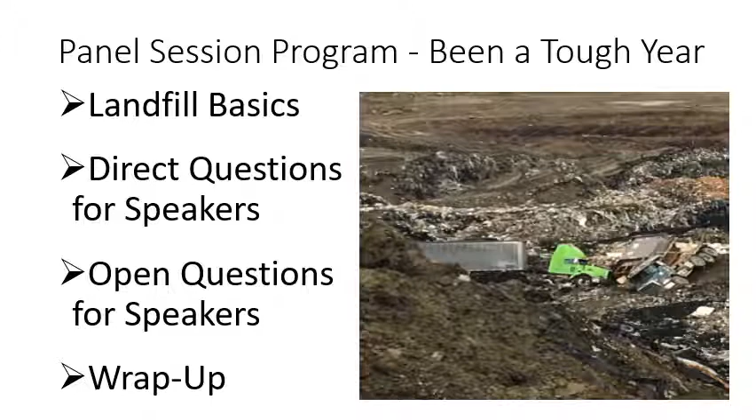So, I don't know where I got this quote, but if not the landfill, then where? I think that speaks directly to the fact that in our biosolids community, we've also come to depend on landfill as an absolute. However, the times they may be a-changing. I think that's from a song or something, isn't it?

But due to the unprecedented year we've had, the pressures on landfills really have become critical. I mean, there's complaints about odors, questions about permit expansions, the trash to biosolids ratio, if no one knows what that means, the changing nature of trash. Trash is changing. Leachate has been an incredible problem this year, the weather, and also increasing costs. So how can we understand the challenges and work that we need to do to balance this? And landfill as an alternative or an option of the last resort has to be considered. So with that, I'm going to turn the microphone over to Jeff Brink, and he's going to make a presentation.

What's it? Okay. Okay, thanks, Trudy. Want to get even closer? How's that? Yeah. I put it in my mouth earlier today just because I, very close. Maybe we should switch over to that one. Let's try that. Well, both of them. I forgot to tell them. This wasn't that bad. Okay.

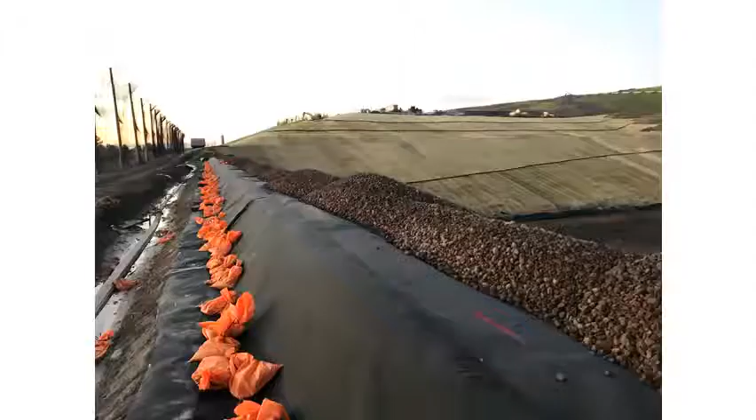Well, somehow I drew the straw of giving a landfill 101 presentation in about 5 minutes here. So I got about 5 minutes of this first part of the presentation to talk a little bit about landfills and actually what they are. A lot of you might know some of the details, but some of you might not. So we wanted to just give you a bit of that: landfills are really a highly engineered, highly technical system, much like wastewater treatment plants are.

We're faced with a lot of the same risks as wastewater treatment plant operators as it relates to odors, quality of materials coming into our facility, and community perceptions and whatnot. And so being in this business for a while, I've been to a lot of wastewater treatment plant tours, and oftentimes on those tours, you see members of the public there. The operators often ask the question, do you know what happens when you flush your toilet?

And we can all imagine there's many, many different answers that we hear to that question, but there's two answers that operators really hate to hear and don't want to hear. One is that, no, I don't know what happens when I flush the toilet. Two, I don't care what happens when I flush the toilet.

And I want to take that one step further and maybe flip it a little bit, and have the operators think about the sludge in their truck in the sludge bay. I want you to think about opening that sludge bay door and that truck leaving, kind of like the proverbial flushing of the toilet. What happens with that truck once it leaves your plant?

And certainly the answers that we as landfill operators don't want to hear is, I don't know, and I don't care. Because sludge quality matters. Sludge quality, even when it goes to landfill disposal, is important to consider for a lot of different reasons. So, a few of the facets of landfills themselves. Before the material even goes into a landfill, there's a lot of things that take place to make sure that things are safe and done well with the landfill.

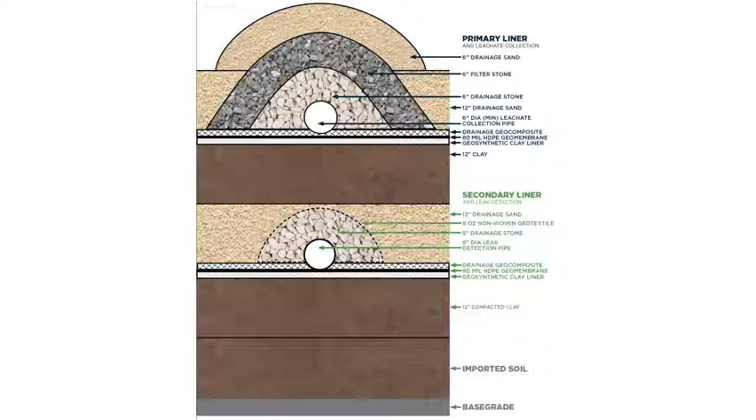And then we get to actually filling the landfill, and it's not as simple as these trucks coming up and dumping willy-nilly. I like to refer to it as a pretty choreographed dance, where there's sometimes 10 to 15 trucks dumping at once. The working face operators, compactor operators are directing the trucks on where to dump, when to dump, and you can imagine there's a lot going on there. And those operators are just trying to get it right. They're trying to bury, blend the sludge as it's coming in with the mixed solid waste. Again, we'll talk about that a little bit later.

Didn't get to 2 other ancillary systems. Certainly when we're done with the lift, done with the cell, actually at the end of each working day, we're covering the waste with alternate daily cover, 4 to 6 inches of cover that's going to keep the birds and vermin and other things from getting into the waste overnight while the landfill is closed. A lot of other systems involved there that I'm kind of glossing over, but then when you fill the cell, you reach a point where you're doing intermediate cover and permanent cover on top of that to seal that cell up and move on to the next.

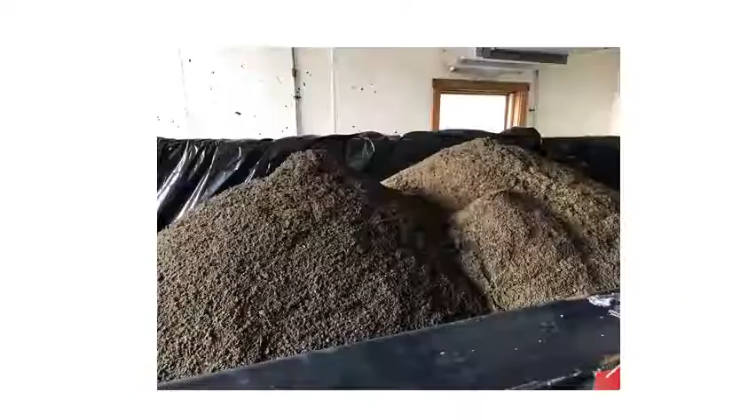Yeah. Sure, I guess so. Oh, is this useful? Good.

All right, well, that was great, Jeff, and a good crash course 101 on landfill operations. You made me think of something when you were talking there, and I jotted it down here. We were talking about hashtags yesterday. Well, hashtag sludge quality matters. Let's get that out there.

All right. But I'm here to talk about some of the factors that are impacting our acceptance of biosolids at our landfills, and a few of them, certainly not all of them, are nuisance conditions, operational challenges that we have, safety being of the highest priority for us, a changing waste stream, and leachate, and also gas management.